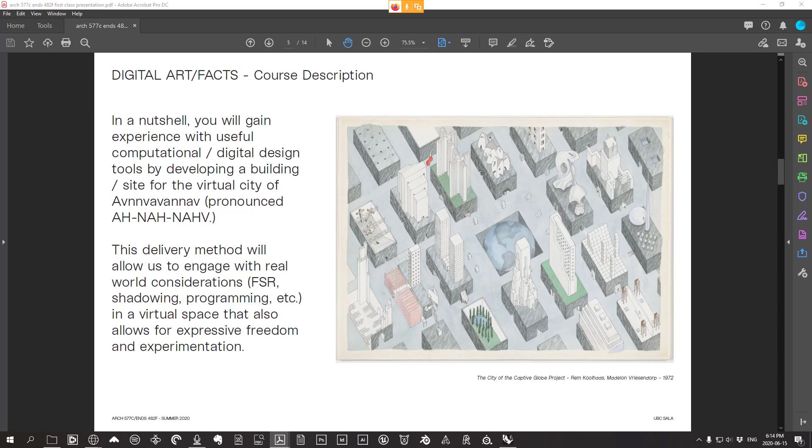This gives us both the name of our island and also a nice confined space to work in this course. So essentially all these very practical constraints are going to be applied to the sites, but instead of everyone working on the same site like we've done in previous courses, I thought we could populate this island.

And honestly, I would be lying if I didn't say that my partner's constant playing of Animal Crossing this quarantine has kind of influenced the island aspect of this. Just seeing this self-contained island, in her case her island of Pachinko, made me think that would actually be very cool to do in a design course.

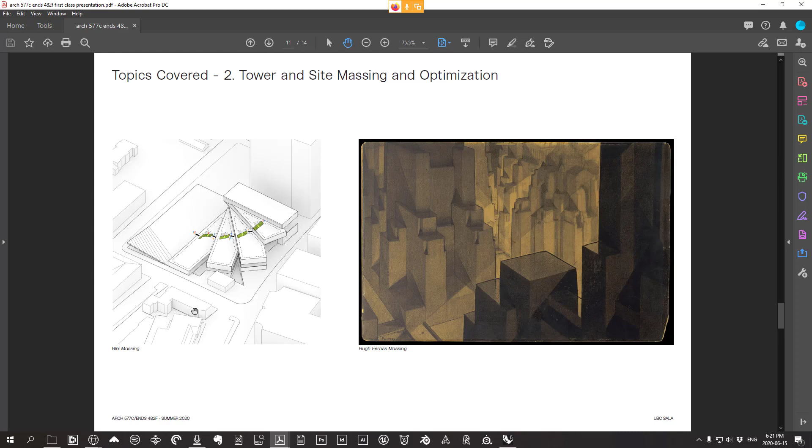You know, all the BIG massing, so it'll be like this, but scattered across this island here. So this thing will be filled with masses.

The third part of the course is—so now we have these tower masses, and we need to figure out how to take them from a shape and turn them into an actual building.

So essentially, the third part of the course will focus on voxel-based parametric design. You can think of a voxel as essentially just a 3-dimensional pixel, or a cell in a 3-dimensional grid.

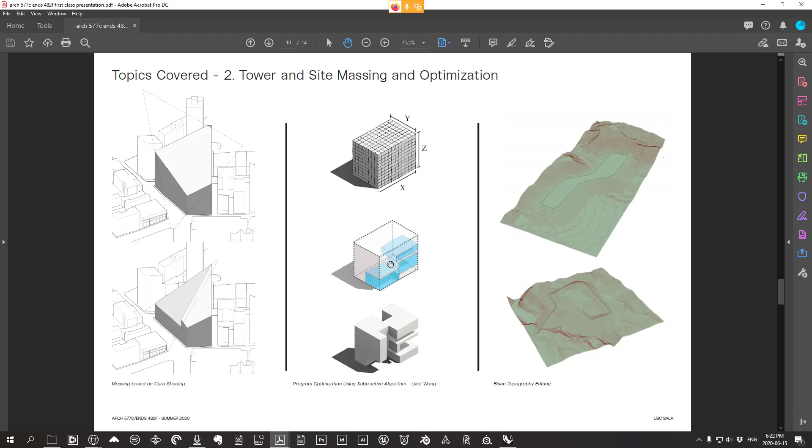Essentially what we're going to be doing is looking at our masses and dividing them up into grids like this. And then we're going to be doing things like taking out spaces for green roofs, for patios, etc. But further than that, we're also going to be doing some other interesting techniques.

After that, what we're going to do is subdivide our massings, and then we're going to look at ways in which we can essentially aggregate cells within those massings.

So we're going to be building off of this, except what we're going to do is take the raster intersection of Monolith, combine it with the cell distribution of, in this case, the plugin WASP, and use it to array certain kinds of cells within a mass.

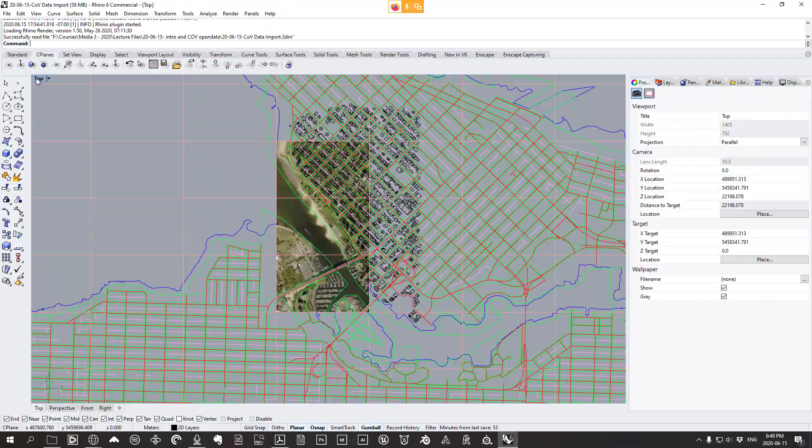Okay, so what I want to do is essentially a la an old school Julia Child cooking show. We'll say, voila, this is what we get at the end of this class. So this is what we're going to be working towards.

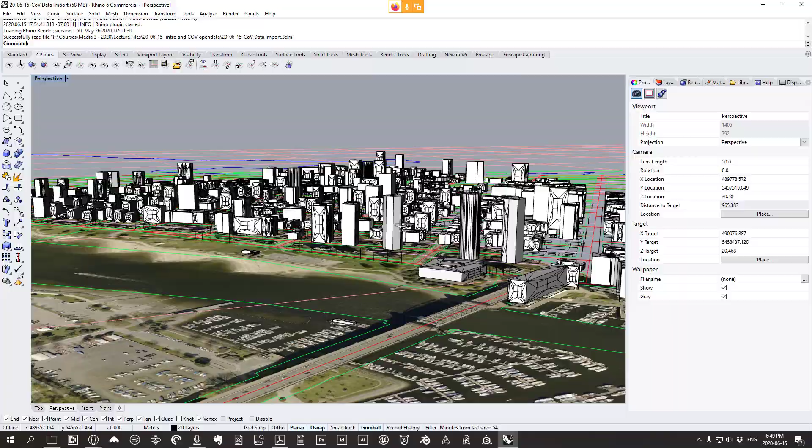In this class, we're going to look at importing data from the city of Vancouver, specifically what are called ortho images—super high resolution images corrected for perspective, kind of like Google Earth. We'll cover how to import them using the GeoTIFF plugin, the freeware, as well as how to import all the road data and block outlines from the city of Vancouver, and we'll dive into using basic Grasshopper to extrude buildings based on the footprints.

As I say all that, I'm thinking we probably won't get through it all, but we have an extra class for this kind of stuff, so that's good. Next class we'll be working with the LiDAR data to make the 3D topo that goes underneath this—right now all these buildings are floating at the proper height, but next class we actually make the ground. So I'm going to close Rhino.

What I am going to do is we're just going to start by downloading some stuff. I'm going to open my web browser and copy the Extensis GeoViewer URL into the chat so you can click that link. Some of you might have installed this already, but since this is the first class, I just want to make sure we're all on the same page. You can install it and save the file.

The other thing we're going to do is go to @it for Grasshopper—this is the Grasshopper plugin. While that's downloading, I'll copy the other plugin in the folder. So @it, we can just open another tab, copy that in—now, one thing I didn't really think about is that you need to sign up for Food4Rhino.

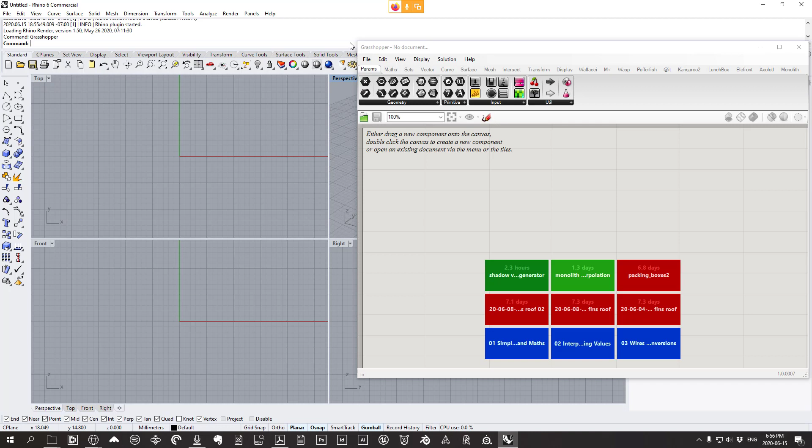So how you install a Grasshopper plugin is just open Rhino, go to your standard tab here and click the button, or if you're in Rhino 5 or can't find that button, type Grasshopper. Now your Grasshopper screen is opened.

Go to File, Special Folders, Components folder, and then you're going to want to copy in the plugin folder. You can see I already have it there, but if I didn't, I would go to the folder which has all this stuff in it, copy the plugin folder, and paste it into my libraries folder, like so.

I'd close that window, then close Grasshopper, close Rhino, and the next time I open Rhino it would be all good to go. So let's reopen Rhino.

We're going to start with a blank screen. At this point, you should have had two programs installed: the first one is the GeoViewer app, and the second one is the plugin for Rhino/Grasshopper. So those are the two plugins we're going to be using for this class.

The first place we're going to go is sort of the promised land of all urban data about the city of Vancouver. We're going to go to opendata.vancouver.ca. Look in the chat, I've just pasted a link there.

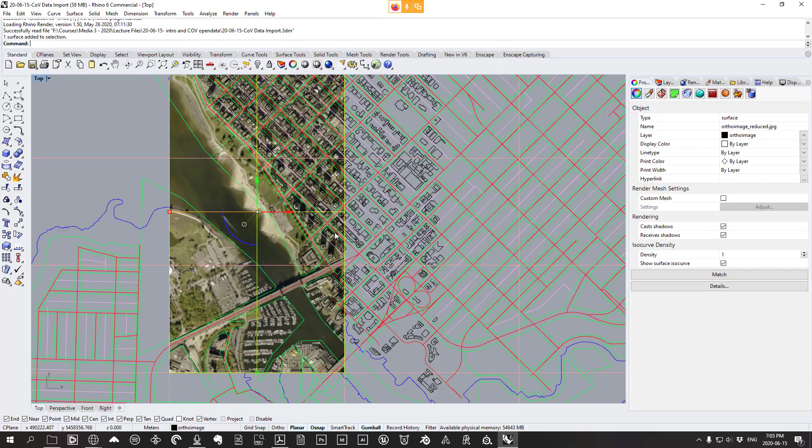Let's right click again, go to folder, and then let's go to raster. Raster is going to be those ortho image files, so these ones right here. So public streets is vector, so let's just drag it into vector. So we have vector, point cloud, raster. So that's good.

Now why don't we just click back a couple times to go back to the main streets and transportation section. So we've downloaded that data in one way, in a DWG format. Now let's go File New. Even if your screen's blank, I want you to go File New because we want to choose the large objects meters format, or template, because all the City of Vancouver data and most GIS data is in meters, at least this side of the American-Canadian border.

So large objects meters. If you do not get that screen and you're not sure where your units are, units in Rhino are under File, Properties, Units, and make sure they're set to meters.

Now once we have our Rhino file open, or our blank file open, why don't we just save it right now? It's good to save often. So I'll save it on my desktop with today's date, however you like saving your files, and I'll call this COV import, and I'll continue to work with this next class. So I'm going to save it, and that is good.

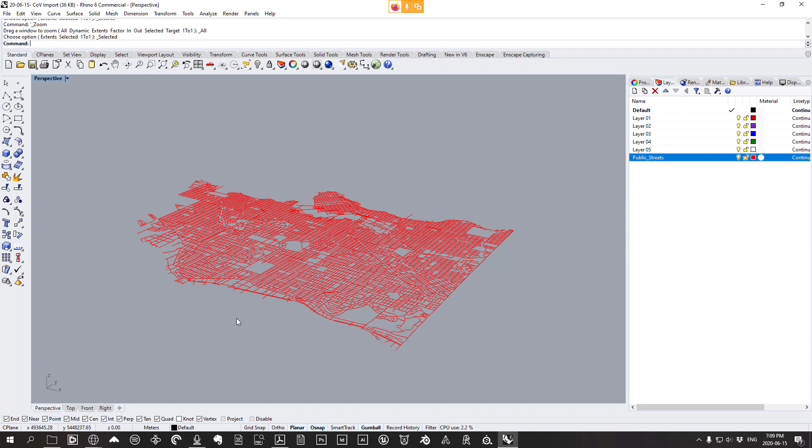So that is public streets. The next thing we're going to do is lanes. Let's open back up our City of Vancouver file and scroll down till we find lanes. There we are. Let's go to export, and then lanes.dwg. Again, make sure export geographical coordinates is set as EPSG 26910, always choose that one. So alternate exports, lanes.dwg, save file.

I will open the folder and copy lanes into vector just to keep it nice and organized. Now this will be a little bit of review, so we can do the same process in Rhino where we import the lanes. Let's go to File, Import, choose Lanes, click Open. Now I'm unchecking this stuff and clicking OK.

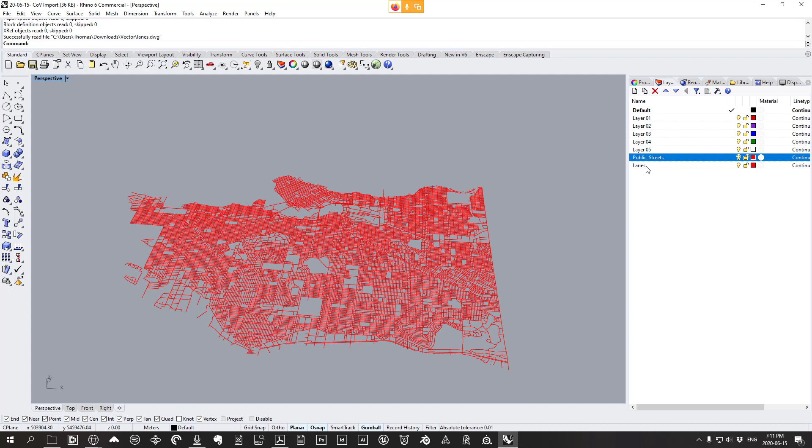So now you can see the lanes have been brought into the exact precise location we want them in, because everything is referenced to the origin, which is way over in Seattle or wherever. Now, to differentiate between lanes and public streets, we can change the color of our layer. So for lanes, we can double click on the red rectangle and change it to pink or something. Now you can see if we look in the top view, we have lanes, and we have public streets of all of Vancouver.

So we're going to do this kind of process for a few other data sets. If you fall behind, don't worry, just make sure to go back and import them.

The other two categories we're going to import in the same way, actually let's just do one: block outlines. Let's go back to our browser, click back so we're in the main location, and let's find block outlines.

You can just click Control F to search for block. If it's in another section, that's okay. What I did was click on the catalog to search in the entire data set, type block, hit enter, and block outlines is partway down the screen.

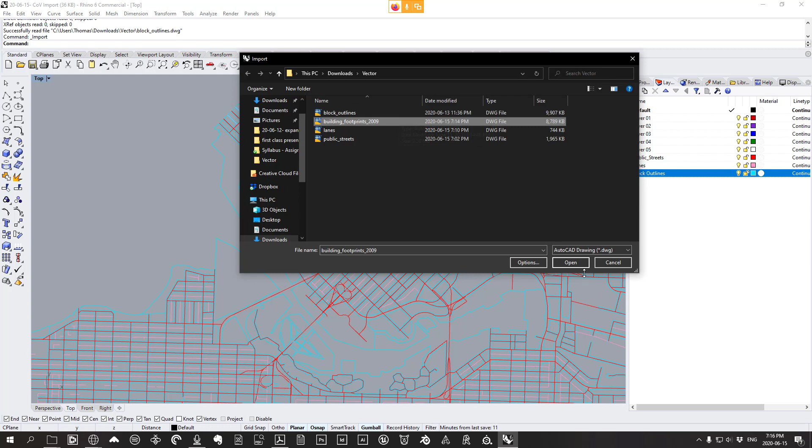Let's also import the building footprints 2009 through file, import. So these can be our building footprints. Let's go all units, meters. Yeah, that's all good.

So this is all of Vancouver, you can see it's a lot of stuff. What we're going to do now is delete everything outside of the section we need. This ends the point of the demonstration using DWG imports, and the reason we stop using it is because other methods give you more control over what we import. But DWG import from the city of Vancouver does work, especially for 2D data, you just probably want to delete some of the extra stuff afterwards.

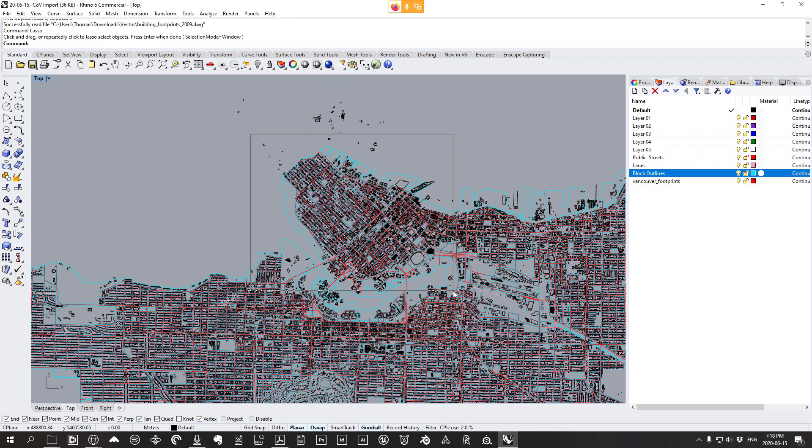The easiest way to do that is to type lasso, L-A-S-S-O. I'm not sure if it works for Rhino 5, to be honest. If it doesn't work for Rhino 5, you're just going to want to select manually. But I like using lasso. I'm just going to select around downtown Vancouver like so, and after that, enter.

Now I'm going to go to Edit, Select Objects, and then Invert. So Edit, Select Objects, Invert. Now I've selected everything else, and I'm just going to delete it. So now what we're left with is a much more manageable chunk of Vancouver.

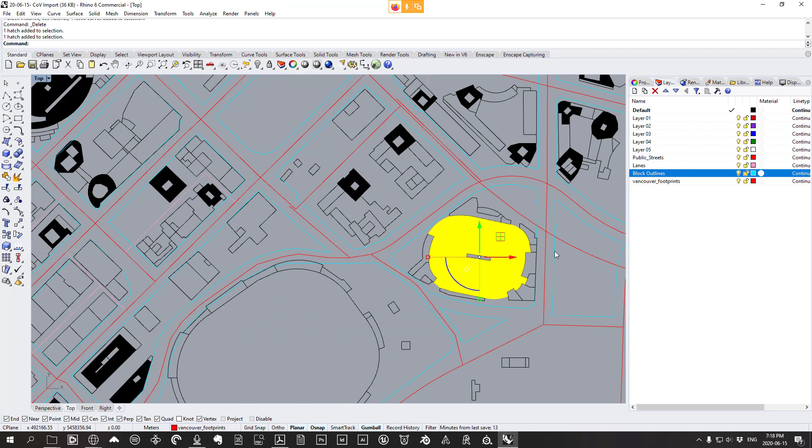That's still a ton of data. You can see there's some fills here, but that's good. One thing we might want to do is get rid of these fills, just because they're kind of random fills that we don't want to format later. We can also at this point go Edit, Select Objects, then go to Hatches, and hit Delete.

The final thing we want to do here is change our Vancouver footprints. Let's rename this layer to Vancouver Footprints 2D, because we're going to import the footprints again in a different data format, just to show you the multiple ways of doing this.

But the second format, the shapefile, is going to allow us to create 3D buildings out of this data. Another thing we can do now is just delete all these extra default layers, and I'm going to save.

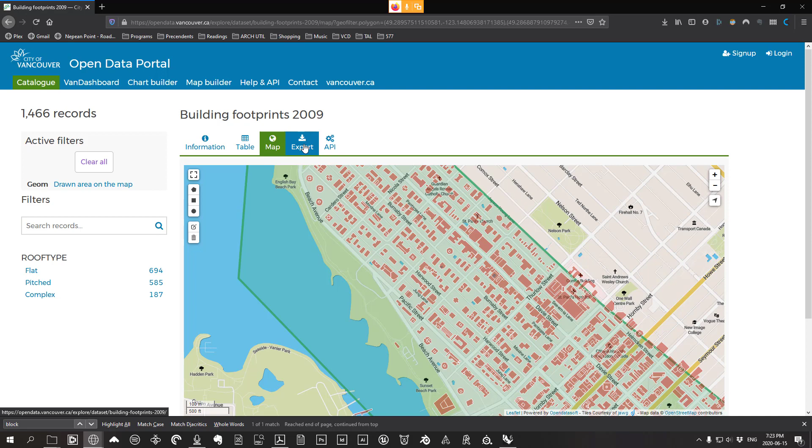Now what happens is it only shows the building footprints that are inside this green polygon. If we go back to export, the shapefile has this new option here, it says only the 1466 selected records. We can download that, but before we click, we need to set our geographical coordinates as EPSG 26910. Always remember that, so now let's click only the 1466 selected records.

It might take a moment to think. Save file. And you can see that it has downloaded.

So once your file has downloaded, let's go into our downloads folder, right click it, go to properties, unblock, okay. Now your computer might not block the downloaded files, if it doesn't, that's a-okay.

We're going to right click the zip folder, extract all, extract to the same location, and now we have these different files. I'm going to delete the Building Footprints 2009 file, and then drag the unzipped Building Footprints 2009 folder into my vector folder. So it lives right here.

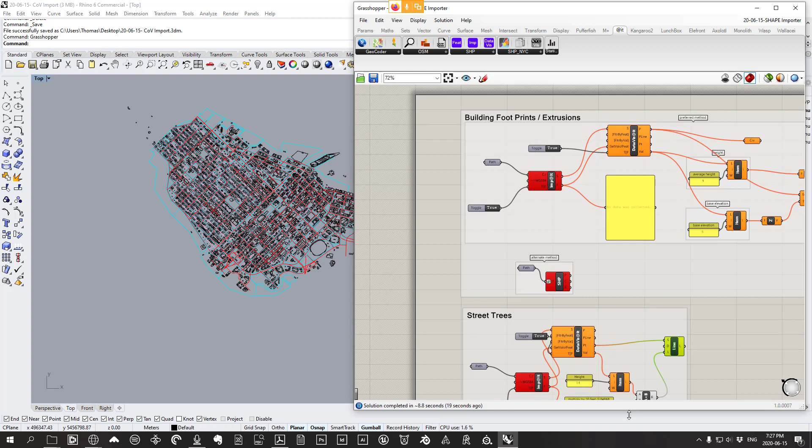Essentially what I'll do is have Grasshopper open in the foreground. It's always kind of weird, I'm sure a lot of you know the joy of using two screens with Grasshopper. But I'm going to try to make the most of it here and sort of go half like that. If you can't see a component, please raise your hand and let me know.

The first thing we want to do is navigate to our shapefile. So we're going to go to Params, then Primitive, and then File Path. So Params, Primitive, File Path.

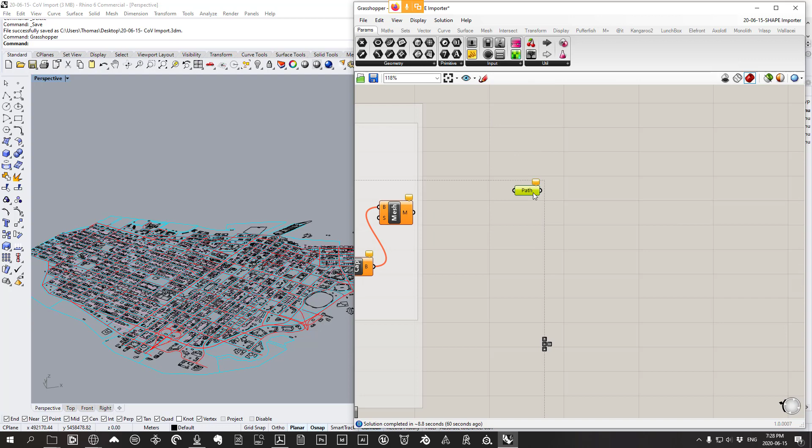Again, if you want to know where something is, if you've placed it after the fact, you can always hold Control-Alt and click on a component, and it will show you where it's located. If you miss where something goes, please raise your hand. But we're going to use Path.

We're going to right-click the input and go to select one existing file, and then navigate to where we've saved our Building Footprints 2009 shapefile.

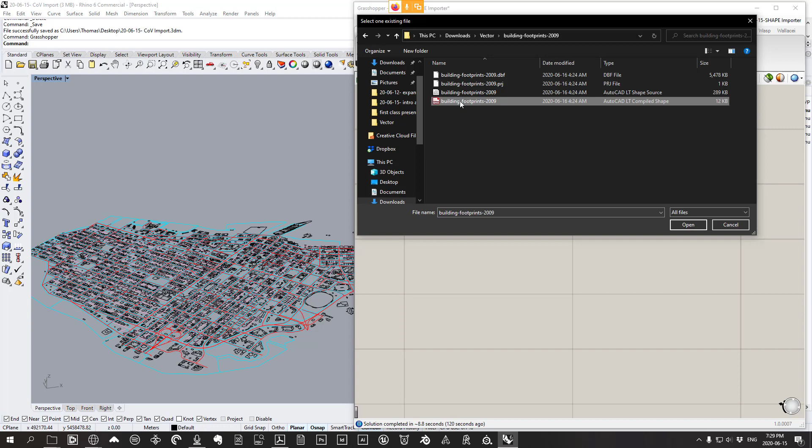The one you want to select is the AutoCAD LT shape source. No, you want to select the compiled shape. That's correct, so you want to select Building Footprints 2009.shx. Then click Open, and now that input will go from orange to gray, which just means you've selected the shapefile.

Now the next thing we're going to do is import with @it. So we're going to go to @it, then Shape, and then Import @it shape. So Import @it shape, lots of contractions going on here. So Imp @it.

So the shapefile, you know what, I think we did need to. Well, we'll see if this one works. I think it might have actually been the other file we need to import. Anyways, connect your path file to the input.

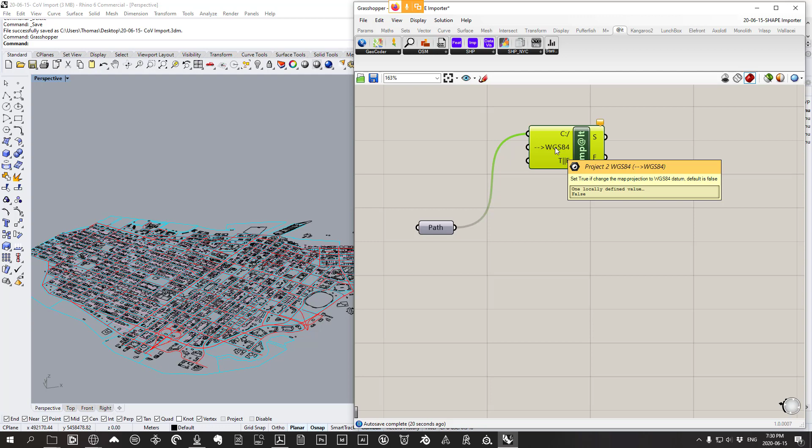The WGS84, we can leave it as default false because our projection is not WGS84, it's the EPSG projection, so we can just leave that as false. And then the final thing is set Boolean true to import the shapefile.

So to do that, we'll grab a trusty Boolean toggle. We'll go to Params, Input, then Boolean toggle. We will plug this toggle into the true-false input. We'll click true. And I was wrong about the SHX, it is the shapefile, so that's fine.

Let's right click on path, go to select one existing file. And then instead of the SHX file, we're going to choose the Building Footprints AutoCAD LT shape source file.

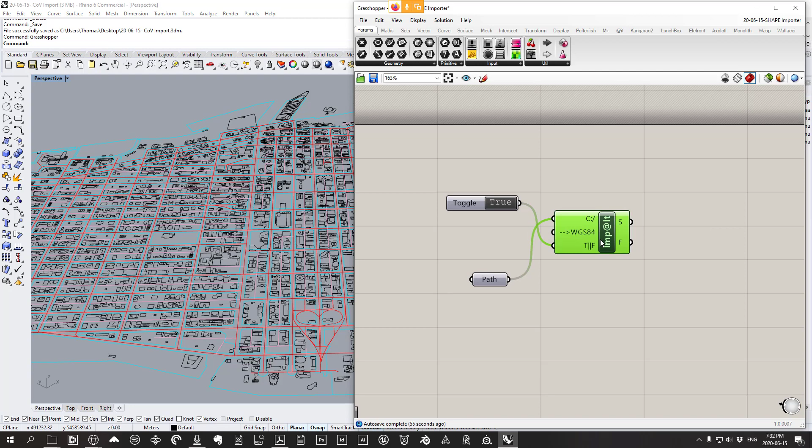And now when we click true, it's gray, it's happy, nothing is giving us an error. So at this point, this is all you're going to have. Now you're not going to see anything because the thing with shapefiles is they have different data sources. They have points which define vectors, but they also have fields which define other characteristics within the shapefiles themselves. That's why we use a special plugin like @it to access those special characteristics.

So the next component we're going to use is @it, Shape, DataVis@it, which is used to visualize spatial and non-spatial data of a specified shapefile. That's @it, Shape, DataVis@it. Now the input is going to be our shape objects. So our import @it's output is going to go into the S input of the DataVis@it.

Now, filter by feature, filter by value, get value of feature, true, false to import shapefiles. Essentially all of these, we need to choose what we want to bring in.

So if we look at our F output here, features is a list, let's grab a panel to see what's in here. Let's go to Params, Input, Panel. So the features output plugs into the panel. Again, trusty Params, Input, Panel. Just a quick refresher, if it's been a while since you've used Grasshopper, you can also double click on the canvas and type panel.

But essentially what we see here is some data that is also saved in the shapefile format, so different fields. You can see here there's ID, orientation, building ID, top elevation underscore m, medium slope, base elevation underscore m.

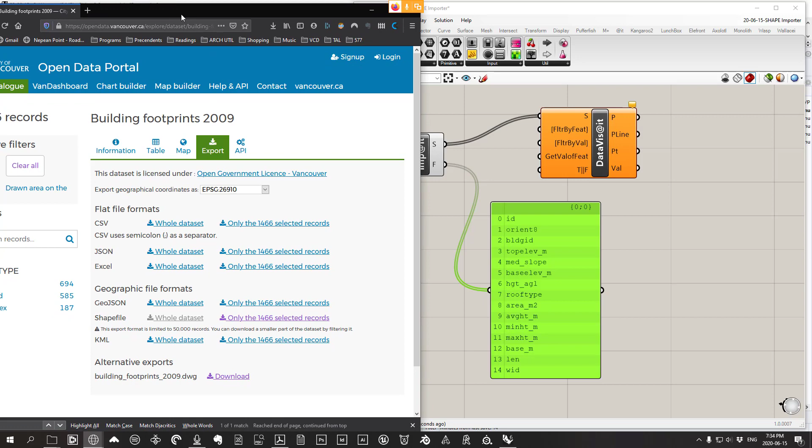Now, if you want to find out what these mean, you can go back to the trusty City of Vancouver Open Data website. Then if you go to information under building footprints, so building footprints information, click on dataset schema, and it's going to tell you what each of these means.

So ID equals a unique identifier for each footprint polygon. Orient8, you know, it's kind of clever, it's like a vanity license plate. Orientation, it's the rotation from north, it looks like.

And then some things that maybe we're a little bit more interested in, like the top elevation, so highest elevation of the building element in meters. Medium slope, so the slope of the roof. The base elevation, so it's the lowest elevation of the building, so that's another one we're going to be interested in, as well as the highest building element above grade.

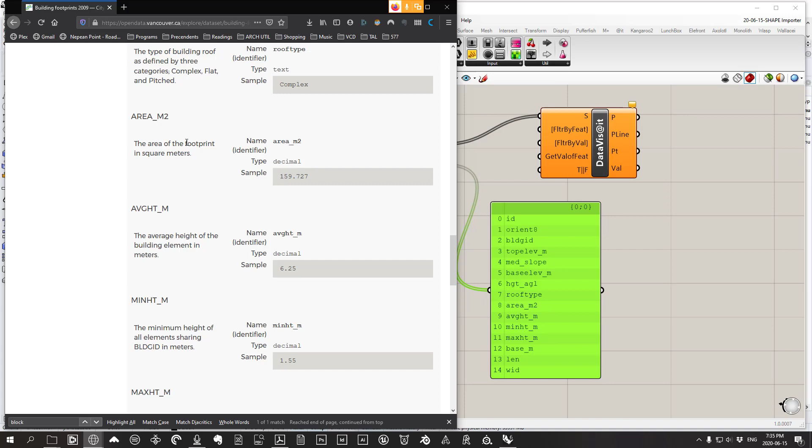Roof type, you know, a bunch of other things. Area could be useful for some sort of project. So all these things, look through them to see what we want.

In this example, I think that I was probably most interested in, let's see what we got here. Okay, I see what I did here. So we're going to use these to filter after the fact.

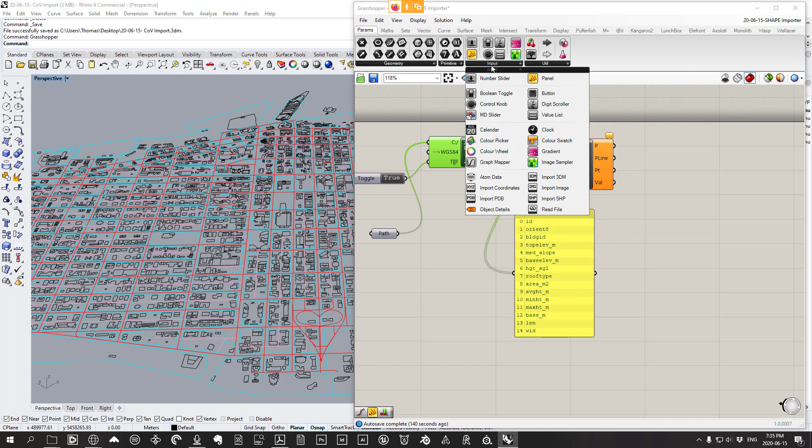So the thing we want to do now is plug a toggle into the true/false input at the bottom, and that's going to make this component work. So we'll go to Params, Input, and then Boolean Toggle, plug it in here, turn it to true.

And then, okay, I see what I did. So what I did was for this, I essentially plugged all of these features into the get value of features. So essentially this first input here is asking for just the basic shape objects that are coming out of the shape importer. The filter by feature, which we'll try using here, I think it's a better way than I did in the past.

We'll leave it blank for now. The filter by value feature we'll leave blank too. But what I did was plug in all the features into get value of feature, and what that does is essentially give us all the data that's in this file. So we get our polygon geometry, our polyline geometry (there's none), our point geometry, and then we also get our values for each polygon.

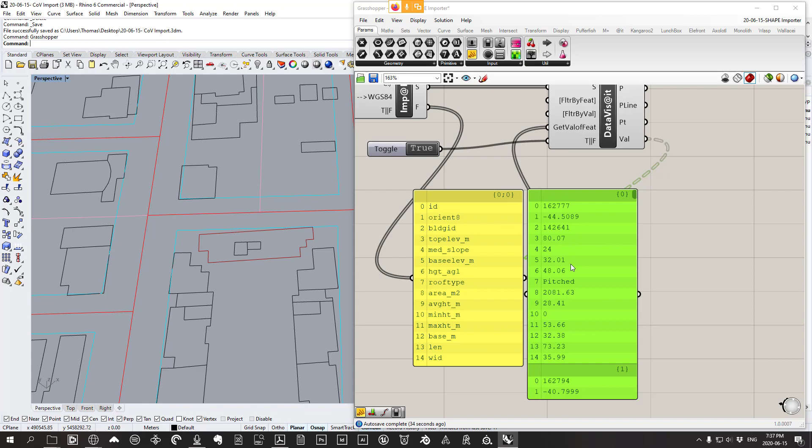It means its orientation would be negative 44 degrees from north. Its building ID would be this number. Its top elevation would be 80. Its base elevation would be 32. And that's how we're going to start to use this data to create a 3D city.

So we'll just move forward with this. Does anyone have any questions about what this data means in here and how it relates to the geometry that we can see here?

I have a mic which I can mute with a push of a button, so not only when I ask you those open questions, it gives me a chance to slurp down a lot of water. So it's good.

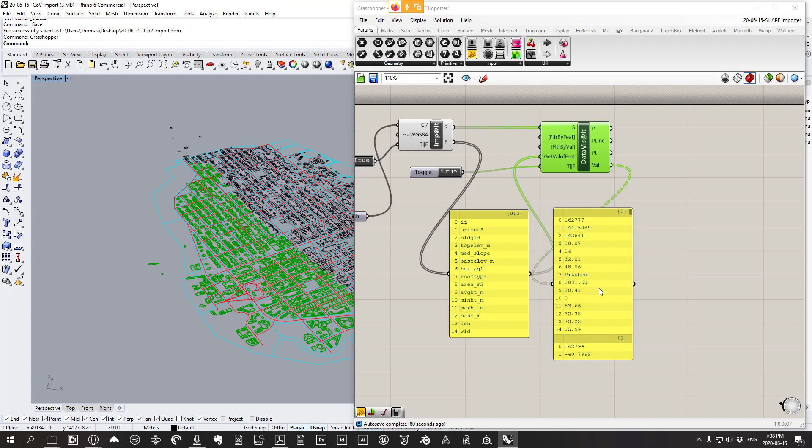All right, so we'll move forward with this. Essentially we have all the imported building footprints, and we have all this data that goes with each one. So what we want to do, if we're thinking about what we want to do, is we are going to take our footprint. That's step one. We have our footprint there already.

The next thing we're going to do is move it up to the base elevation. So we're going to take this footprint and move it up. In this case, base elevation is 32 meters, so we'll move it up 32 meters.

And then the next thing we're going to do, I'll bring it over here, is take that base which has been moved up, and look at the top elevation, and then extrude it to that height. Top elevation in this case would be 80. So that's the thinking behind what we're going to do here.

Now, you might want to get fancy in the future, and maybe this is a way you get those extra bonus marks for assignment 1. You could look at the roof angle and start to tilt the angle of the roof, but in this case I'm just going to look at how we can bring in this data quickly and extrude in 3 dimensions to get a quick but accurate site model.

So to grab this data, essentially what we're going to do - you can see that each of our polygon shapes is brought in as its own tree, or its own branch. So let's go to Params, Utilities, Param Viewer, just a quick review, and take the P output, the polygon geometry of the shapefile, and plug it into the param viewer.

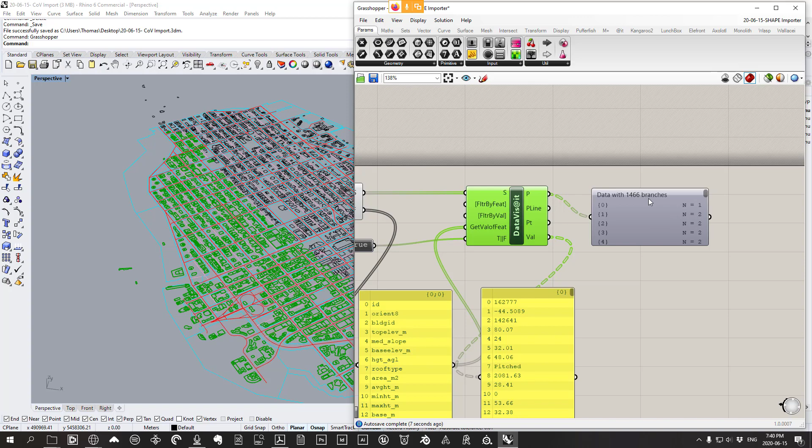Essentially what you can see is that we have a whole bunch of branches, 1466 branches. What that means is each of these outlines is in its own branch, which means we can look at it in isolation. If we want to look at it another way, we can go to Params, Input panel, take the polygon geometry output, and plug it into the panel, and you can see we have some polyline curves here.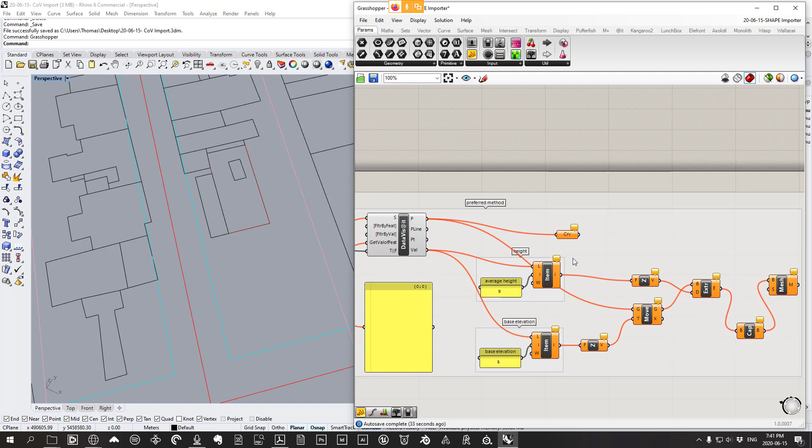Now, some of these curves - you can notice there's more than one curve in each group. I'm not exactly sure why that is. It could be that the curves are not joined, or maybe it's because they are open or something. But I'm going to try joining them.

So if you ever see something like this where it seems like you might want to join them, we can try joining them. If they join, great, if they don't, that's fine. So let's go to Curve, Utilities, Join Curves, and plug that in there. And it looks like that didn't do anything, so that's fine. What that tells us is that in each branch there might be more than one building footprint, so that's fine - we can just delete that.

Okay, so first let's grab the base elevation. Base elevation is index 5, so in each of these branches, the index 5 item, or the 6th item, is going to be the... can you please draw full names? Perfect, good thinking. And also, for future, just raise your hand in case I don't see it, but I caught that one, so that's good.

We can actually just delete the join curves, to be honest. So what we're going to do is select the base elevation, which is the 6th item, or index 5, in every branch. So we can go to Sets, List, List Item. The list we want to operate on is our attached values - that's what I'm assuming it stands for. Plug it into the list, and the index we want is 5, because index 5, we can see on the side of our panel, is the base elevation. So list index equals 5, so let's grab a... go to Params, Primitive, Integer.

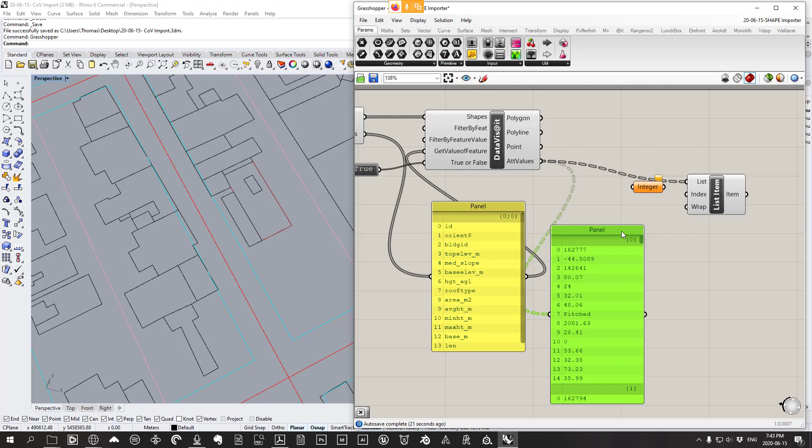I'm going to right click on integer and rename it to 5, just to remind myself what is in there. Then I'm going to go to set integer, click 5, click enter, and commit changes.

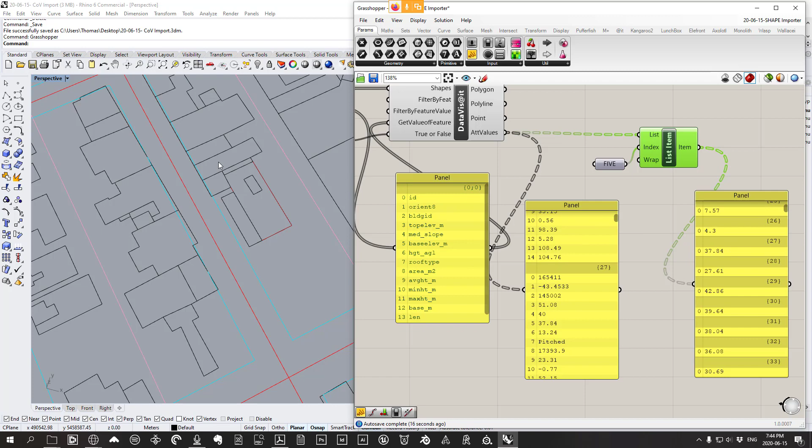So the output now is 5, and I'll plug that into the index. Now we can see we have a whole bunch of bottom elevations. If we choose a panel, input panel, we can see 32.01, that's the first base elevation. Scrolling through, 37.84, that's the 27th. Scroll down to 27 there, we'd see it. So those are the base elevations of all those outlines.

What I can do now is group this. I'm going to select the 5 input and the list item, right click, and go group. I'll group this just to remind myself later what this is actually doing. I'll right click the group, right click on the purple box there, and call this base elevation data.

The other thing I can do while I'm here is select all this, group it, right click the group, and call this shapefile importer.

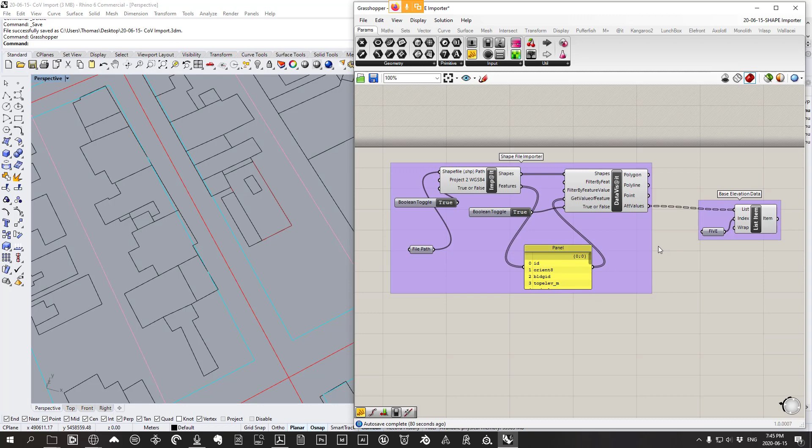The reason why I'm doing this is just a good habit to be in, and it also is how you're going to get full marks for the annotation portion of your assignment. You can see I do it here, I label things, I group them together. You can write a note to yourself as well with a panel.

So I'm going to double click on the canvas, type panel, and put this panel in this group. I'll double click it and write something like, remember, this is going to help me import .shp file and not .shx file. You can do stuff like that just so you remember what's going on here, and then I can add it to the group.

So we have our shapefile importer and our base elevation data.

The next thing we want to do is bring in the top elevation, but if we go back to the City of Vancouver open data, there's another category that actually sounds like something better than we want. So yes, the HGT_AGL, the building element height above grade level in meters. Essentially this is top elevation minus base elevation, so this is essentially the building height.

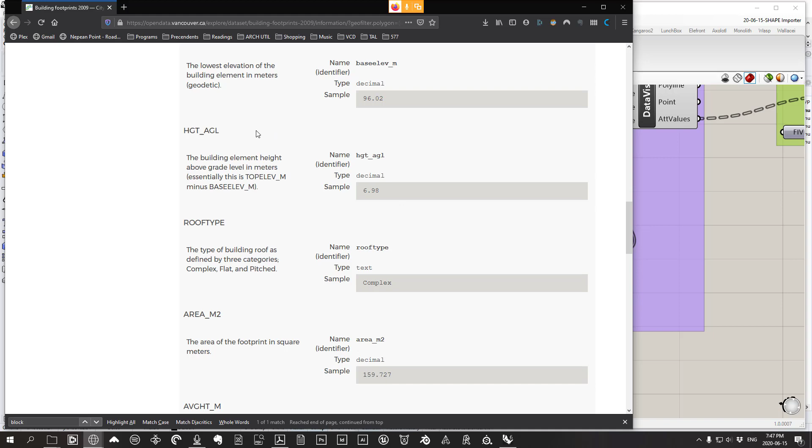So we're going to use this building height for our extrusion height. We won't even worry about the top elevation, we'll just use this height instead. So HGT underscore AGL, if we look in our panel here, sort of our legend of the data we're bringing in, we can see HGT AGL is number 6.

So then what we can do is recreate this list item thing. I'll do it again just to review. I will first grab an input, go params, input, primitive, then integer. I'll right click it, write 6 just to remind myself that we're looking at the 6th. You could always do something like 6 bracket HGT underscore AGL, this is really just to remind ourselves. I'll go set integer and then 6.

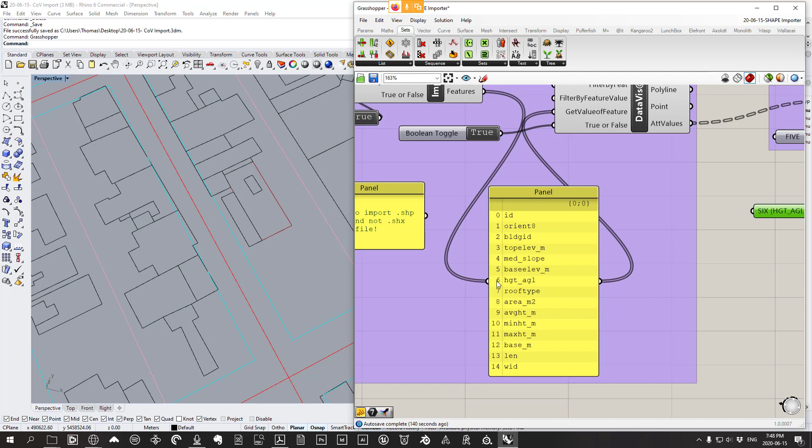And then after that, what we want is a list item, so let's go to sets, list item. Six, I'll plug into the index. Again, the index is the location in each list, so the 6th index or the 7th item in a list. I'll plug 6 into index, and the list we're going to be looking at are the attached values again. So now you can see we have a bunch of single heights coming out of the list item.

What I will do is select both of these components, right click outside them, go group, and then right click on this and go building height.

So quite simple. Now, when you're this far, what I'd suggest you do is let's save. As a lot of you know, if you've used Grasshopper, things crash. So let's save this as 200615 shape importer, however you want to save it, that works for me.

And yours should look something like this at this point. Now what we want to do is move up the base curves and then extrude them by the height, and then we'll convert these to meshes.

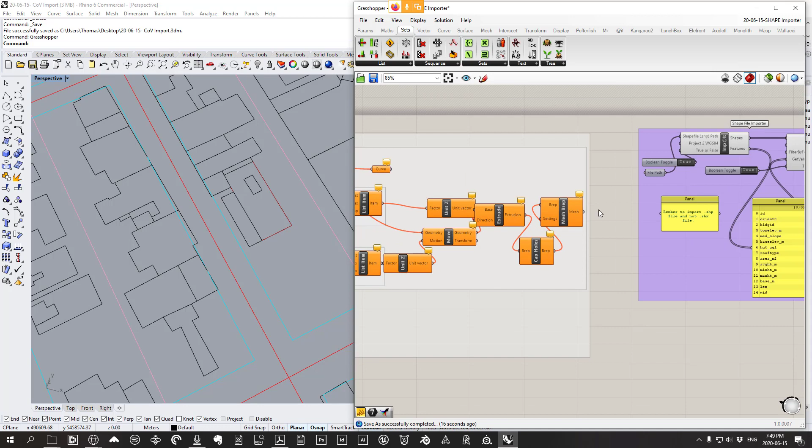So first let's move up these shapes. Let's take our polygons, these are all the polygons I've imported. Then let's go to Transform, Euclidean, Move, to move an object along a vector. The geometry that we want to move are the polygons, so let's plug polygons into geometry.

We can just move down these groups to sort of make things a little bit cleaner.

So anyways, you can see by default all these buildings are moved up, because the motion by default, or 10 meters, is 0, 0, 10. So 0, 0, 10, that's X, Y, Z. Z is in the up, down direction.

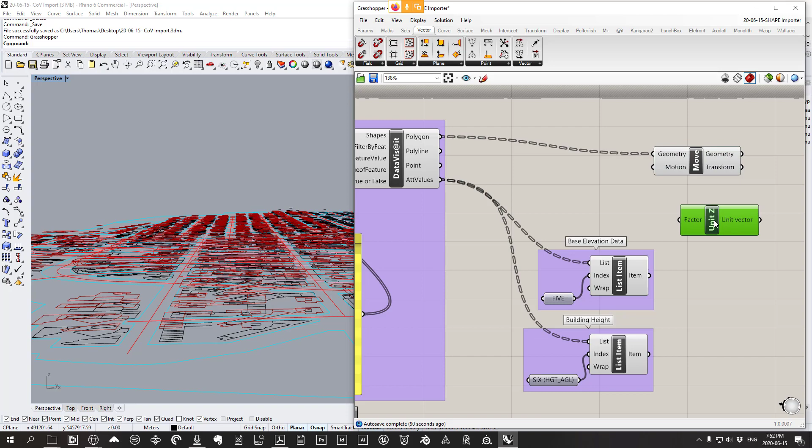So what we're going to do is switch out that default value for the value defined by the base elevation data. We want to go to Vector, Vector, Unit Z. And again, if you look in the bottom left-hand corner of your Rhino viewport, you have your XYZ compass, so just a refresher, Z means up. And what we're going to do is plug our base elevation data into the factor input.

So now what we get is a whole bunch of up vectors with the base elevation as their amplitude. When we plug those into the motion, you can see they're all now moving to different heights. And even if we look at the elevation, they're starting to get the real coordinates—like Vancouver, it sort of tilts up as it goes towards the center of the peninsula. So that's looking good.

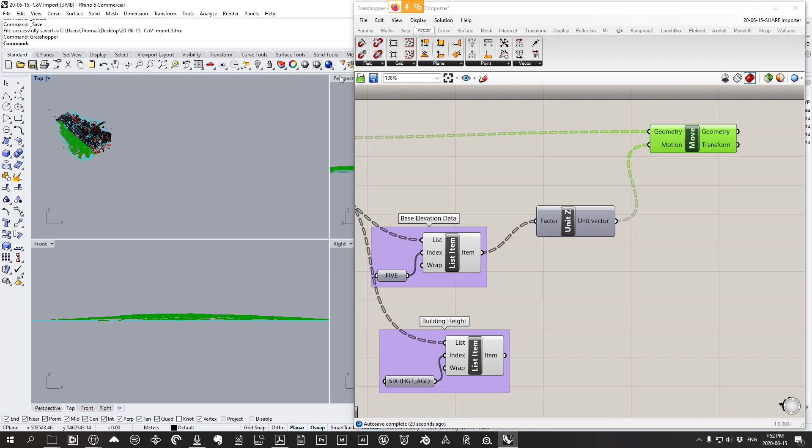The next thing we're going to do now, since we've moved these up, is let's just quickly group this. Right click, group these things, label it, let's just say 'moving up the footprints.' Again, when you're doing your hand-ins for this class, and just for personal good habits, organize your Grasshopper files. So move them up, and then we are going to go to Surface, Freeform, Extrude.

Extrude has two inputs, so it extrudes a curve along a vector. The base is going to be the profile curve or surface, so that's going to be our geometry that we just moved up, the footprint. Let's plug that into base.

And the direction is again going to be a Z vector, but it's going to have the building height as its amplitude. So let's go to Vector, Vector, Unit Z, and plug the building height into the factor input of Unit Z. Then we will plug the unit vector into the direction input.

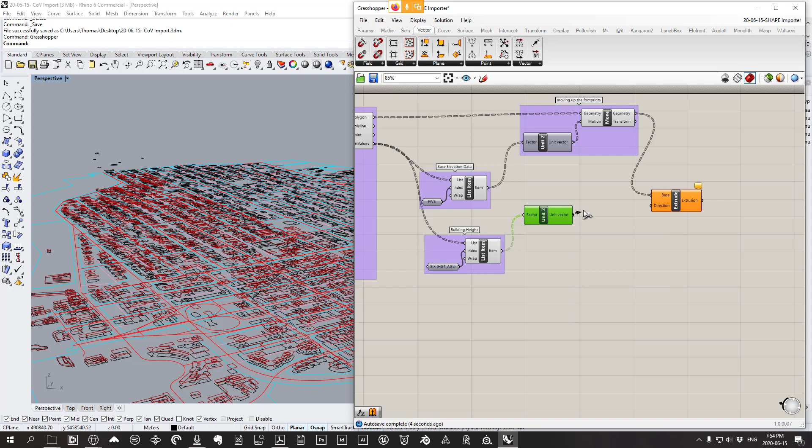Now, voila, you have Vancouver. That's pretty neat—as a starting point to a site model, you could do much worse. All these buildings are accurate, as far as it's based off City of Vancouver LiDAR. Like I said, we use the same data set in professional practice. We spruce it up, use the building angles, or the building roof angles and everything. But City of Vancouver will accept this for a zoning or rezoning application.

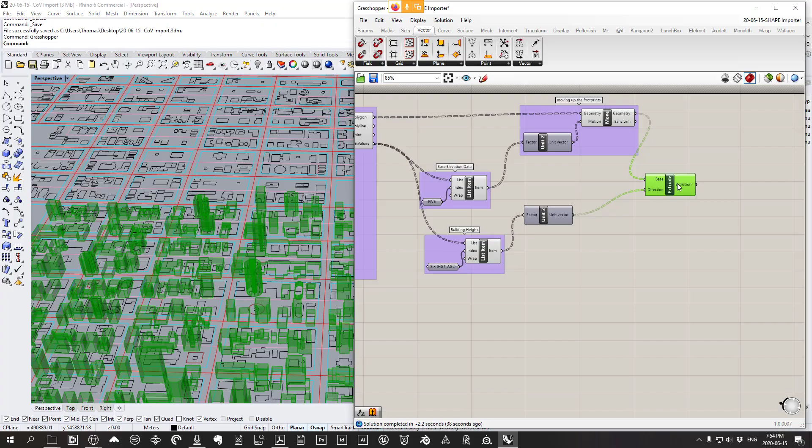So now we have these extrusions, but let's cap them. What we're going to do is take these extrusions and fill the little holes at the top. We'll go to Surface, Utilities, and then Cap Holes, take the extrusion output, and plug it into the BREP input.

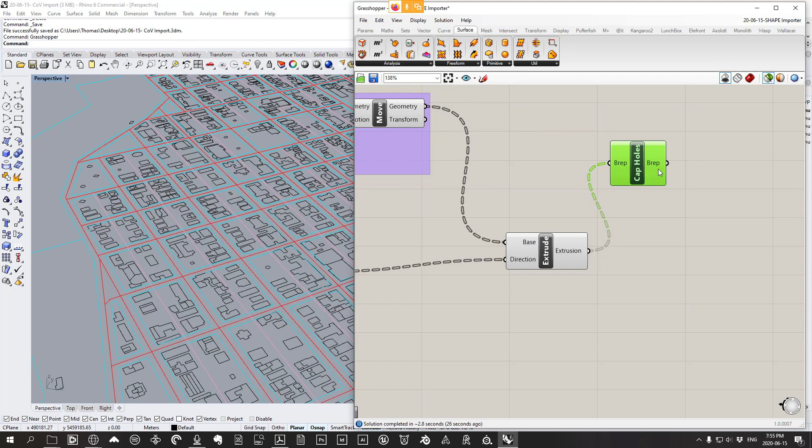So what Natalie is referring to is if you go to display, you might have no preview on and then you won't see anything. Or what might happen is you have under display selected only preview. And if that's the case, if you selected cap holes, mine doesn't preview either. So maybe that's it.

But what you can do, and what I always do, is go to display and then just select shaded preview. That's kind of the default setting.

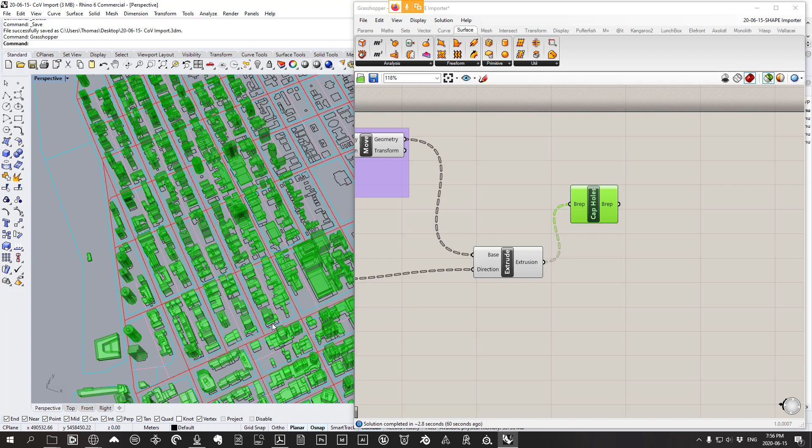Also, if you're not seeing anything and you've imported in, okay. So Kevin, let me quickly address some of the issues here. One thing that could happen, and it's happened to me before, is you want to double check your coordinate system. If you export with WGS84, it's going to export a different coordinate system. What you could try doing, if that's the case, is setting 'project to WGS84' to true. That might move your shapefile to the same location as the rest of your geometry, if your geometry was imported with the proper EPSG coordinate system.

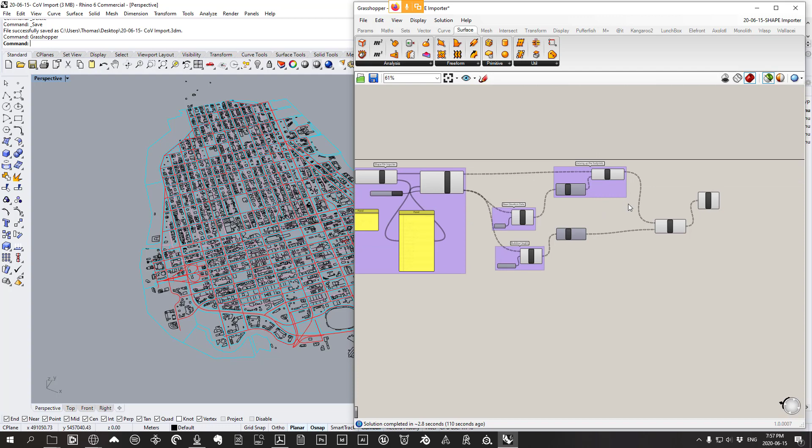If your geometry is showing up in different spaces, it's for sure because you accidentally chose WGS84 for one of your imports. And again, for anything else, it could be your display. But if you're still having an issue, anyone, just let me know and I can take a look after class.

So anyways, I've capped all the holes here. The last thing I'm going to do is, unless you were really going to go back into this geometry and work on it to add detail in Rhino, it's best to convert these to meshes, because meshes are much lighter on your system. These are all BREPs, boundary representations, NURBs. What we're going to do is convert them to polygon meshes, so we'll go to Mesh, Utilities, Mesh BREP.

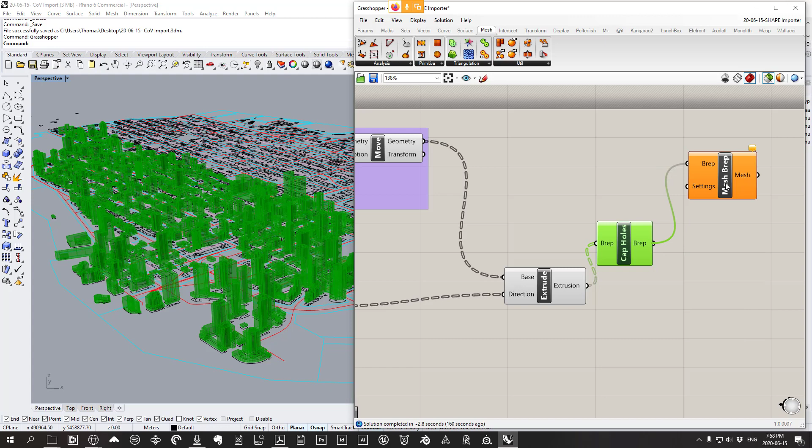We're going to plug our BREP into the BREP input. Now what I'm going to do is preview off all of this stuff. And now you can see I have my building meshes, so that's great.

What I'll do now is in Rhino, make a new layer called 3D building meshes. Then for Mesh BREP, I will right click on the output component there, click Bake, select the 3D building meshes layer. For something this big, I might want to group it. So maybe group, yes please. I'll click OK.

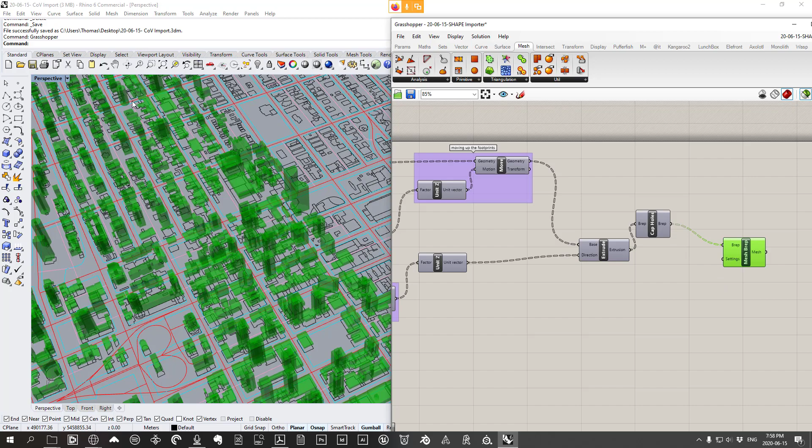And of course it's doing an autosave right now. But as soon as the autosave... oh, there it is. Okay, so that's great. I'm on wireframe view, that's why we couldn't see it. So there are all my meshes. I'll just move the grasshopper window to the side.

Also here, all they are in rendered view, so you can see that this is pretty cool. It's all the buildings in this portion of Vancouver. When I was a student, there was essentially one City of Vancouver file floating around, maybe it's still floating around that everyone used. Now you guys have no excuse to use that old, out-of-date file. You can all make your own City of Vancouver file quickly.

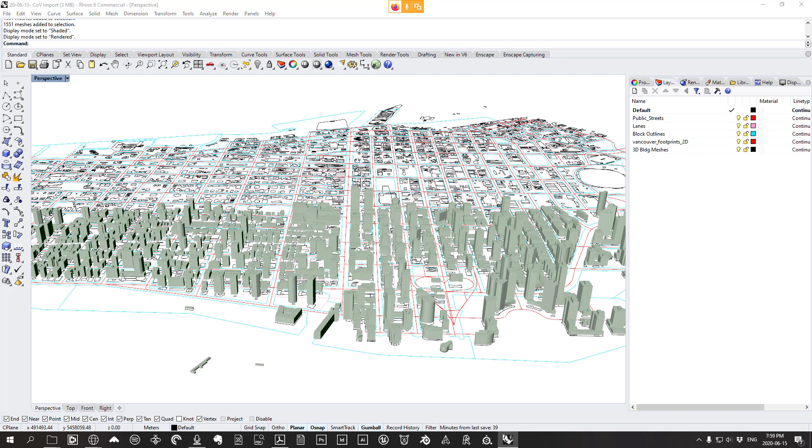So does anyone have any questions?

Okay, excellent. So let's save the shape importer first. Maybe what we'll do is group these last little sections here, right click it, and call it footprint extrusion. So there we are, save this, and this is essentially a tool in your toolbox. So save this as the shape importer file.

You will want to use this in the future, very handy. So that's sort of the first thing, how to import a shape file and how to access its attached value. Like I said, you could think about how to start to perhaps angle the roof space on this, but I'll leave that to you to figure out.

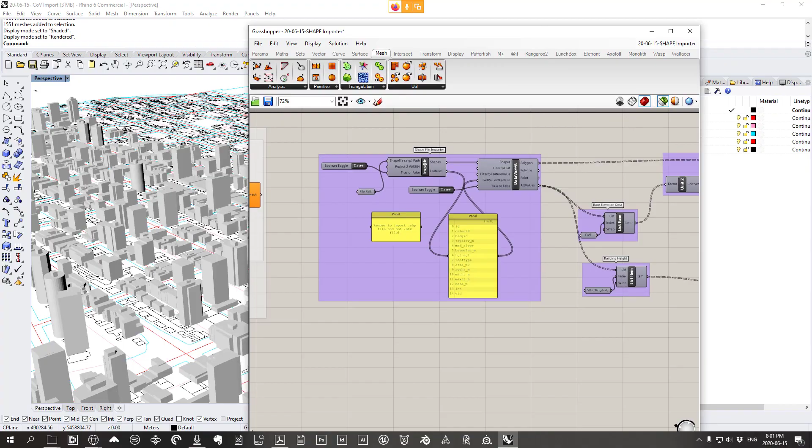All right, so what I want to do now is look at importing street trees. We're going to import their location first, and next class we're going to populate them with actual geometry. So this is something that's really, really interesting.

The City of Vancouver Open Data has essentially a catalog of all the street trees with all their proper Latin names that you landscape architecture students have memorized. So it's a really huge and interesting data set.

So let's go back to the City of Vancouver website. Let's go to catalog. And on the main page actually is street trees. So let's go there, let's go to street trees.

If we look at the information page, scroll down to the bottom, click on dataset schema. You can see that there's the genus name, there's the species name, there's the cultivar name. Can someone let me know what a cultivar is?

It's blank, so the City of Vancouver doesn't know what it means either, but that's all right. There are some other useful things here too, like the height, the height range ID, and the diameter. So tons and tons of information, very, very useful.

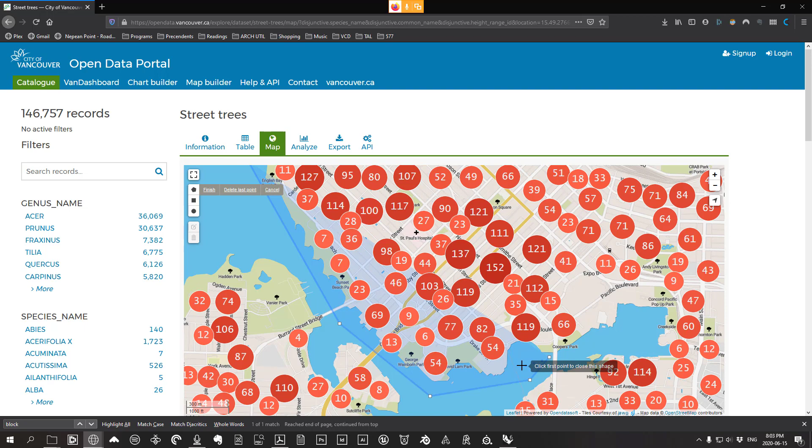So we're going to select the polygon tool again. I'll zoom out and roughly choose the same kind of place as last time. Once the shape is closed, you can see we have all these shapefiles selected. We'll go to export, making sure to set our coordinate settings to EPSG 26910, then go to shapefile and download only the 1,636 trees. It'll take a moment, then we'll click Save File.

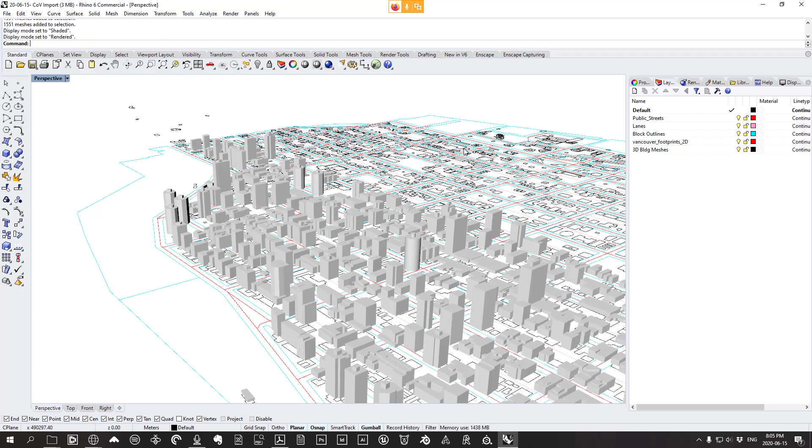Okay, so let's go back into Rhino. Like I said, I'm breaking this up into two parts because next class, if I look at the syllabus, we're going to be downloading a plugin called Elefront. Essentially, Elefront allows you to use blocks, and for trees that's really important because it allows us to model one tree and then array it across all these placeholders we make in this class. Then if we want to update that tree, we can just edit the block and all the trees in the entire site will update. It's a really good workflow. You can also see how it's a little foreshadowing of the future when we're using blocks in towers and then finally blocks in rendering with Unreal, so it all ties together.

But for right now, we're just going to import trees and represent them with lines. So that's what we're going to do right now. This is just my little notes here, and I have enough to work off of.

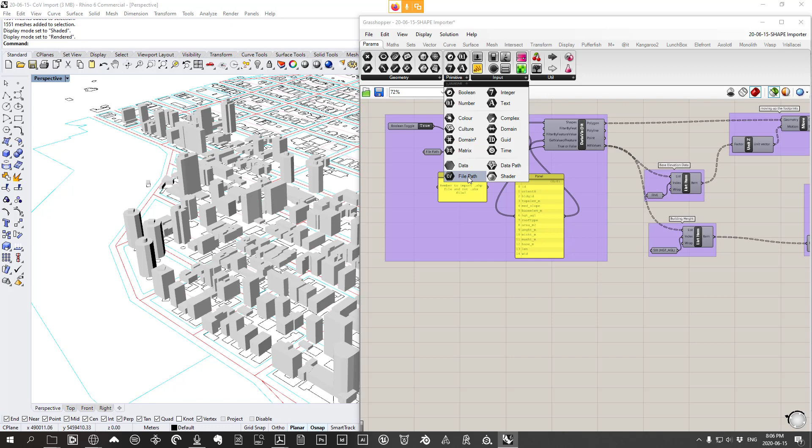So what we're going to do is go to primitive, go to file path. I'm going to right click the file path, select one existing file, go to your streettrees.shp file, street trees shape source, and open.

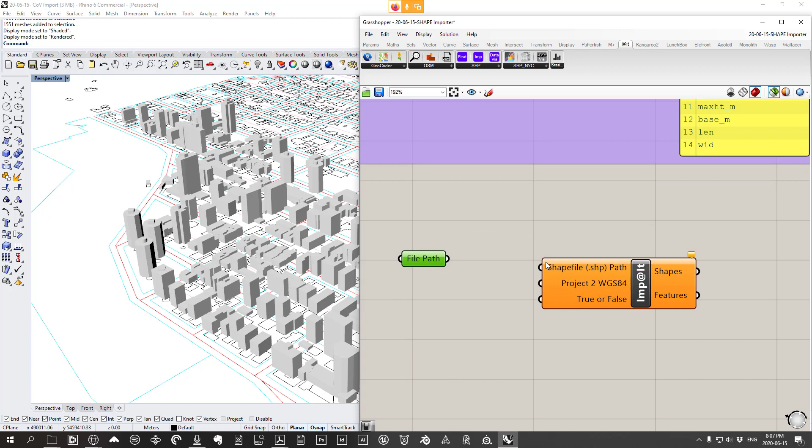Now we're going to go back to the @it plugin. We'll go to shape import, import at it, import and store shapes, put on the canvas. We'll plug our file path into the shape file path input, leave the project to WGS84 blank, and then true or false we'll grab a Boolean switch. So let's go to params, input, Boolean toggle, plug that into true or false, double click it. Now you can see nothing's really showing up here, but we have some shapes coming out as well as the features.

So like we did last time, a little bit of review, let's grab a panel. I'll do this the quick way, double click on the canvas and type panel, then take the features and plug it into the panel. This lets us see what we have here.

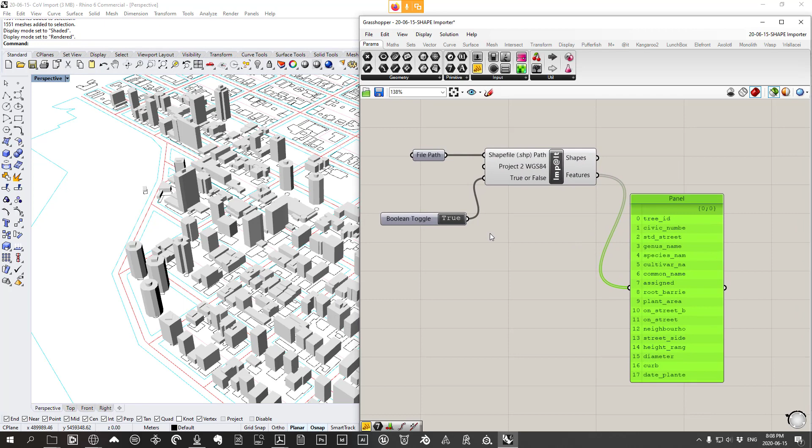You can see we have all these different things here. Why don't we look at the data that we have in the City of Vancouver, let's see what we have. Let's go back to street trees, information, schema.

In the future, you will have enough knowledge, particularly you landscape architecture students, to take the genus name and species name and assign blocks by these species and genus names. I'll go through this as an extra at the end of this section, so we're not doing it right now. We're just going to work with height, and then diameter next class. But for this class, we're just going to work with height.

So forgive me, I'm just kind of a dumb architect who doesn't know anything about plants. I work closely with a landscape architect right now, and I always show him renderings I did, and I feel embarrassed when he shakes his head like, no, that's not how plants work in the renders. But we're just going to deal with heights and positioning of the plants for this class, and we'll go back into the genus and everything else later in the course when we have a bit more knowledge.

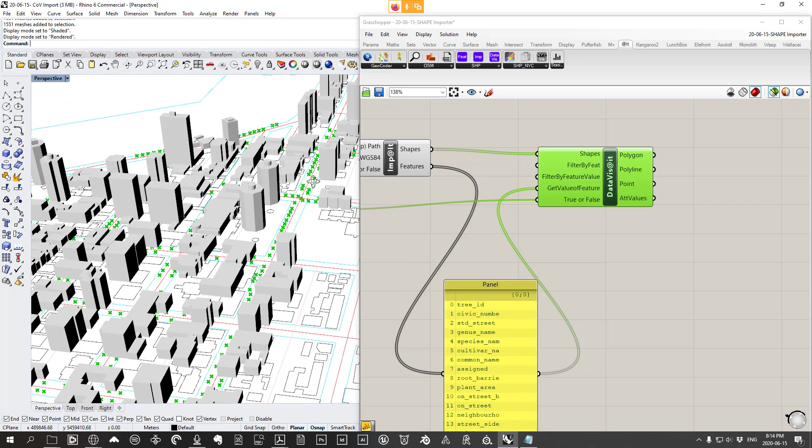So now you can see, kind of interesting, what we get here is a bunch of dots - the point, we get a point value. So this essentially is giving us the location of the tree. And what we're going to do now is extrude a little line from each of these dots to represent the height of the tree. Now, right now we don't have a ground plane, and I don't believe that these trees have elevational data.

Yeah, so they don't have elevational data, but that's okay, because what we're going to do next class is work with the beginnings of the trees we import, and then intersect them with the ground we import in.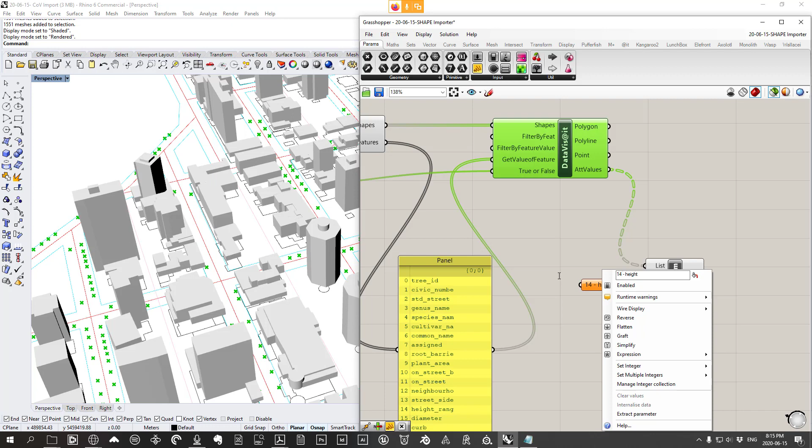So what we're going to do now is grab the height range, number 14. In the attribute values, let's select number 14. Let's go to Sets, List Item, AttValues, plug into list, index number 14. Let's go to Params, go to Primitive, Integer. I'll right click it and call it 14, or put height range to remind us. I'll go to Set Integer, I'll click 14.

These are going to give us a bunch of height ranges. Let's grab a panel, so I just went Params Input Panel. The panel gives us all these values: 1s, 2s, 3s, 7s, etc. Remember, we're going to use this format here.

So the output times 10 plus 10. What we're going to do is take this output and use a formula. So what we can do here is go to Maths, Script, Evaluate.

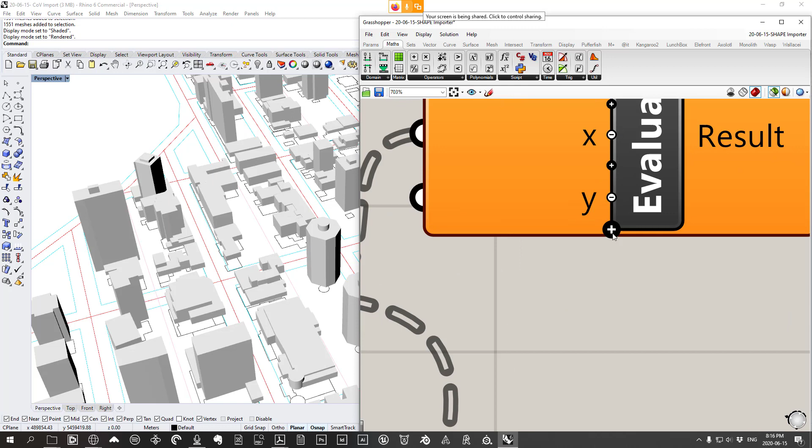Let's plug our item output into variable x. Let's rename this input to just x, because if you don't rename it, you'll have to type variable x, and that's a lot of typing. We can also zoom in, and click the little minus node right here to get rid of the extra input. We just need one input, the output there.

And we will double click the Evaluate to bring up the expression editor. If you remember the little expression we had thought of, it's the output, so x, because x is the input, times 10, plus 10. And if we think back to our BEDMAS: brackets, exponents, division, multiplication, addition, subtraction - don't need brackets. So we're all good, click OK.

And now our result from 1, if everything went right, should be 20. Let's see, let's double click on the canvas, type panel, take the result, plug in - so 1 equals 20. So that's great.

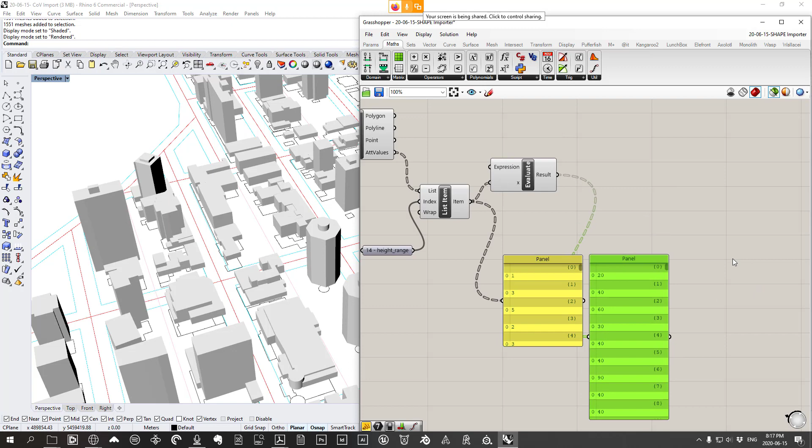Now what we're going to do is take these results and use them to draw a line from the point that we get out of the DataVis@it component. These are going to be placeholders for our trees, and next class we'll move them up to the surface once we import the surface.

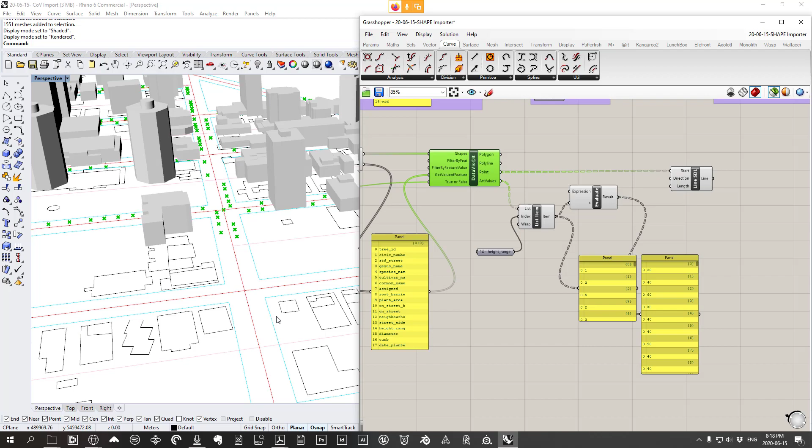So now we want to go to Curve, Primitive, Line SDL. The line start point is going to be our point values that come out of the DataVis@it, so point values will go into start. Direction by default is Z, so 0, 0, 1 - that means x equals 0, y equals 0, z, aka straight up, equals 1. So it's direction straight up. And the length will be the result of our expression here. And now you can see we have all these trees.

Oh, the expression, sure. So the expression is x times 10 plus 10, and your input is x. Now, there might be something here that you notice is a little bit peculiar. Essentially, these trees are taller than all the surrounding buildings. And while Vancouver might have some nice old growth trees in it, they're not really this tall.

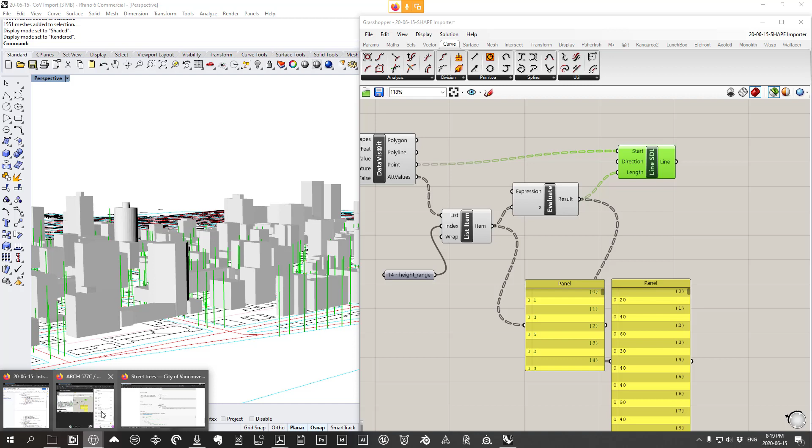So let's go back and see what's going on. Oh, remove the y variable. The way you remove it is you zoom into the component and click the little negative icon next to the y. You also need to rename this variable to be x - by default it's going to be variable x, and then it won't give you a result. So you need to rename it, just right click on variable x and rename it to x. And then you're going to see the lines here.

So like I said, these lines are way too tall. If we look back at the City of Vancouver street trees entry, you can see height range ID, so 0 to 10 for every 10 feet. If you think about it, our units are in meters, right? So essentially that's why they're way too tall, because we're drawing them in meters when they're giving it to us in feet. So what we need to do is convert the feet to meters.

To do that, we can simply divide by approximately, I think it's 3.3, or something a little bit more exact. We can just go 'feet to meters' in Google, equals 0.3048 meters. So let's just copy that 0.3048, I'll copy it into the chat.

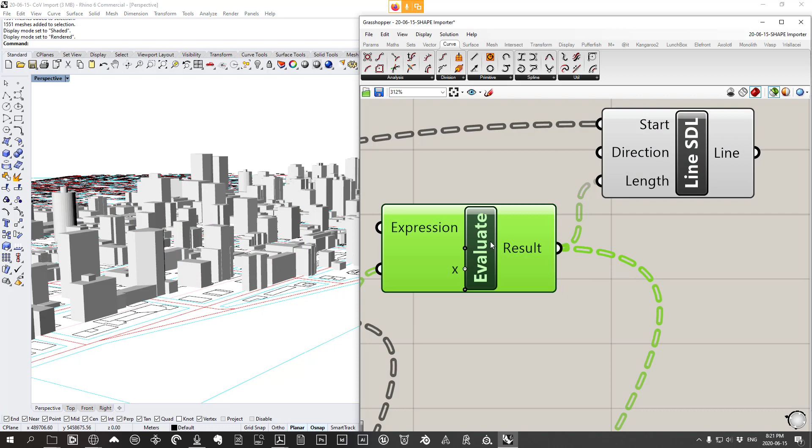Now let's go into our expression editor and do an addendum to this. Let's put brackets around our entire definition, so add brackets around the x times 10 plus 10, then put times, the little star, and copy in the 0.3048.

Click OK. And now you can see our line is much more reasonable. That will convert our trees to meters, so those are the actual heights of the trees.

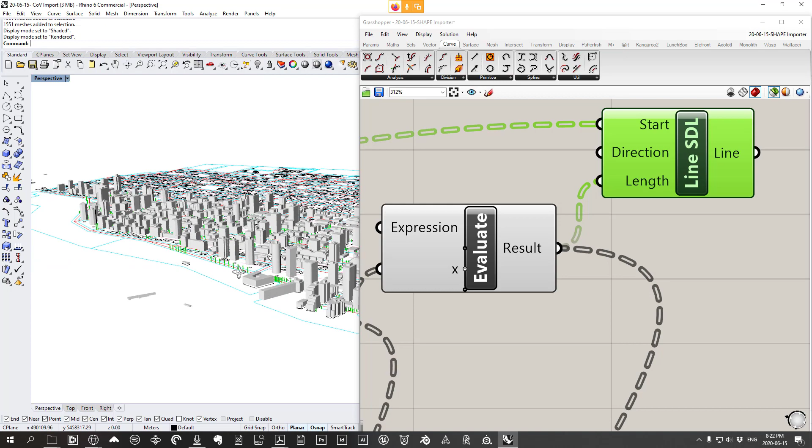Now, like I said, we will have to wait till we import the LiDAR data, so that'll be next class, to bring these trees up to the proper height. What we'll do is simply take these lines, bring them up to the proper height, and then populate them with blocks.

For right now, I'll leave it to you to organize this a little better. Group things, label them like you did above. You can do that after class or whenever, just because I want to get to one more thing in the last few remaining minutes. So at this point I will actually just leave this for now.

Save this file, maybe in the same document. Maybe I'll group it all and just call it trees, just so I remember. But we're going to come back to this one. I just wanted to group the trees import in the same kind of lecture as all the import.

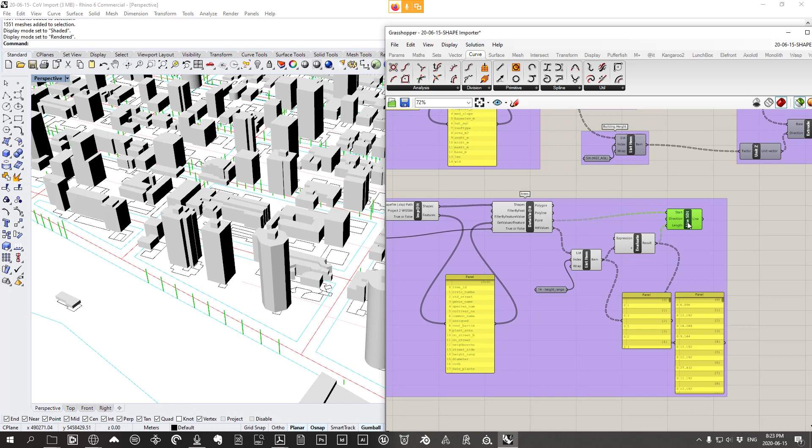So any questions about importing trees? Or half importing them, really?

Okay, so that's great. I'm going to close Grasshopper. What we're going to do now is make sure to save your Rhino file at this point.

What I'm going to do is start organizing my layers here a little bit more. I'm going to make a new layer and call it 2D info, and drag all my 2D info into this. So everything right now except for the 3D building meshes gets pulled into 2D info. Then I'll also make a new layer called 3D info and drag my 3D building meshes into there.

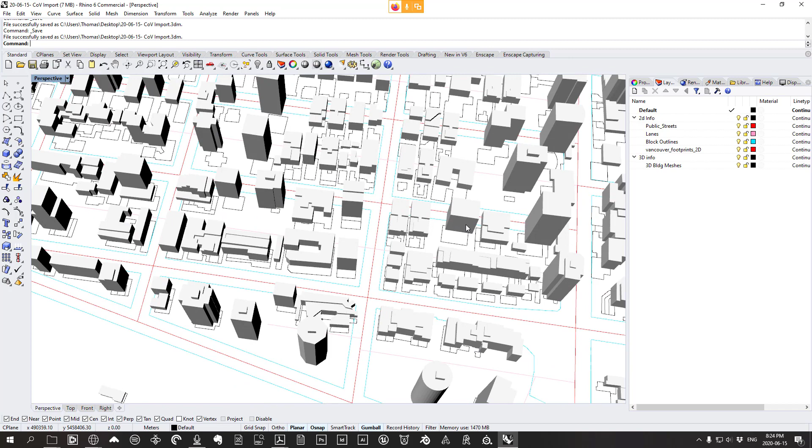That'll just make it easier when we come back to this next class. So the final thing I want to do is import the ECW data. ECW data is the ortho images, or the sort of Google Street View type satellite images. The reason you want to bring those in is that if you look at the block information the city of Vancouver gives us, you can see these blocks are legal blocks, right? They don't actually describe accurately the shape of the sidewalks and everything.

So we are going to want to import the ECW or ortho imagery to be able to clean up these blocks, to trace them. So what we're going to do is go to the City of Vancouver site again, click on Catalog, then click on the side theme. We will click on Geography and Imagery. Now, right at the top of that, you're going to see Ortho Photo Imagery.

Essentially what's going to happen is we are going to import some ECW files. So, here, I just want to check something in my notes, sorry.

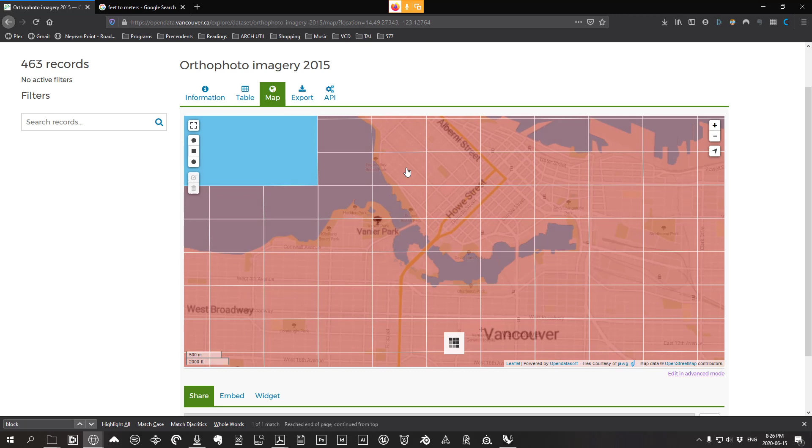Okay, so what we're going to do is go to Map. I'm just going to do this for one file right now—actually, I'll do it for a couple. So in the map I'm going to click on this block right here, essentially choosing the files I want to grab ortho imagery for. I'm going to click this one here that has Cardero and Davie and English Bay.

And then I'm going to click on the ECW URL and save it. So it's a little bit different—we're not going to the export anymore. What we're doing is clicking on the map and just exporting that way.

So I'm going to download that section, this section here that's right below. Again, clicking on ECW, save file. And then maybe I'll download this one that has the Granville Bridge as well. Now you could download more.

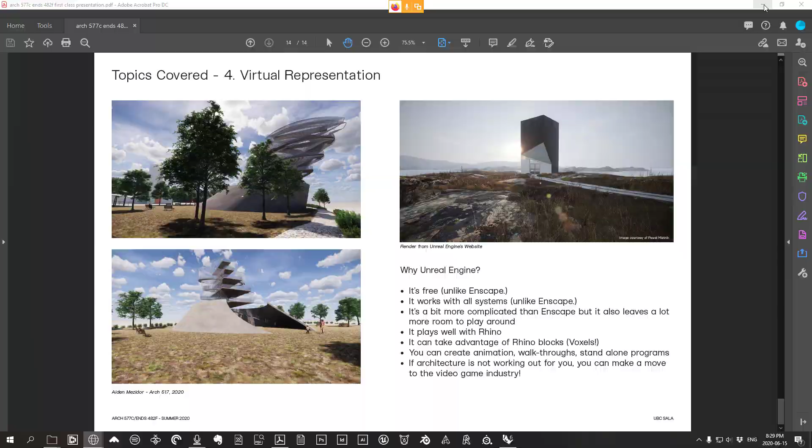My script for the trees is looking really good. There's no error codes, but the tree, like the green dots, aren't showing up in my Rhino window. I've reset the file and made sure it's unblocked and done all the classic things. Can you think of any reasons why I might not be seeing my tree points?

But you're saying the lines are showing up? No, I'm saying I don't have any errors in my script. I can see in my panels things show up and it looks pretty good. Should I just maybe try to restart? Yeah, you can do that.

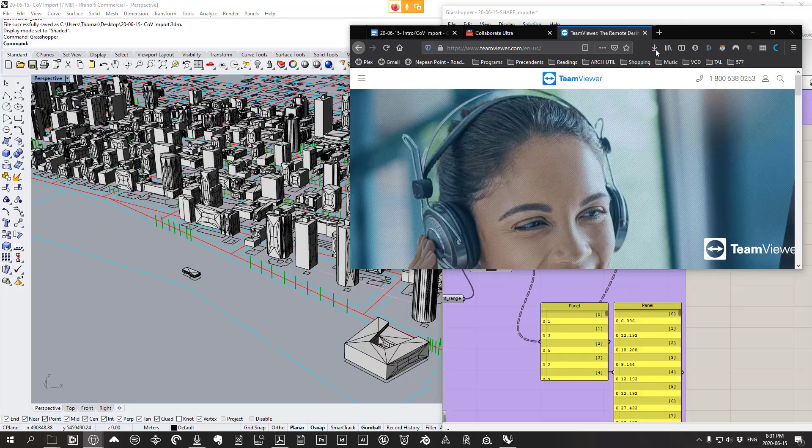And also, maybe what I can do, this is kind of, I mean, what we can do as a class for this, but also for help sessions in general or one-on-ones. If you guys want to download TeamViewer, just look it up, essentially it's a remote control. I use it all the time at work to help people in my office if they run into issues. We could use that to solve problems either in the one-on-one desk crit setting or for questions like this if we're trying to troubleshoot. So for now, I'd say install this. If you want to stick around for a couple minutes, then I can take a look. But that's probably the way to do it.